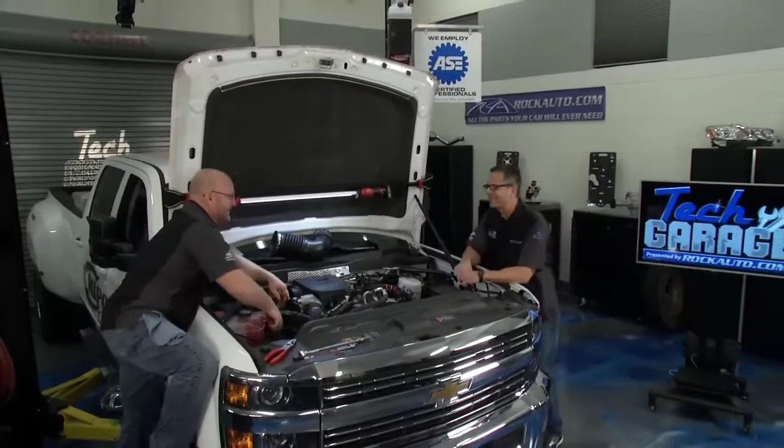Well, I went down kicking and screaming this season. First it was the hybrid, and now a 6.6-liter turbo diesel. Key word is diesel. Brian, I love the rumble, I love the torque, I love the power, I love the truck. I hate the diesel fuel.

Well, you know, there's a lot to love about a diesel, and some of it is that maintenance has just got to get done. It's not necessarily pretty and all that glamorous.

This appears to be one of those projects, but you said you had some rough starting symptoms and you heard some air sucking. So we're starting with the water fuel separator here. Talk about that a little bit.

Exactly what's going on. Well, you know, this is a work truck, of course. You go out in the morning, it doesn't want to start, sometimes hugely extended starts. I come out, I pump, pump, pump, it's ready to go. Next day, pump, pump, pump, it's ready to go. Well, I'm tired of getting out and doing that or going over meeting the guys to do it. So common problem with these Duramax is definitely that water separator sucking air.

You know, we got a couple options with Rock Auto as far as replacing the whole thing or just the seals. We'll rebuild this one, we'll put a new one on. We'll make a decision once you get it off. But you go ahead and get it off. I got a demo to set up and we'll show actually how it works.

Awesome. These things have a huge job. It literally separates the water from the fuel. Pretty cool how it does that. John's going to show you. But for us, instead of just rebuilding it from the top, we're going to replace the whole unit. There's enough miles on this truck to do that.

Routine maintenance, you'll see. You want to drain that petcock at the bottom on a regular basis and keep the water out of that system. Bad things happen in that combustion process, in the compression of all of it when you've got water in the system.

So there's two bolts back here that hold the bracket that hold it on. I've got them loose. That allowed me to have a little bit of flexibility to get the fuel lines removed. I got one to go here, and it's a little bit of an arm wrestling match down in here, but we'll get it while John tells you how this whole system really works.

Now, gasoline versus diesel, what's that all about? Well, let's take a look at a gasoline system and our own diesel system, and you can see the difference in why we actually are replacing our pump. If you look right here on this first graphic, you can see port fuel injection or direct injection. They're both gasoline, whether we're coming up here in the intake manifold down or we're going directly into the cylinder. That could be a gasoline direct injected engine.

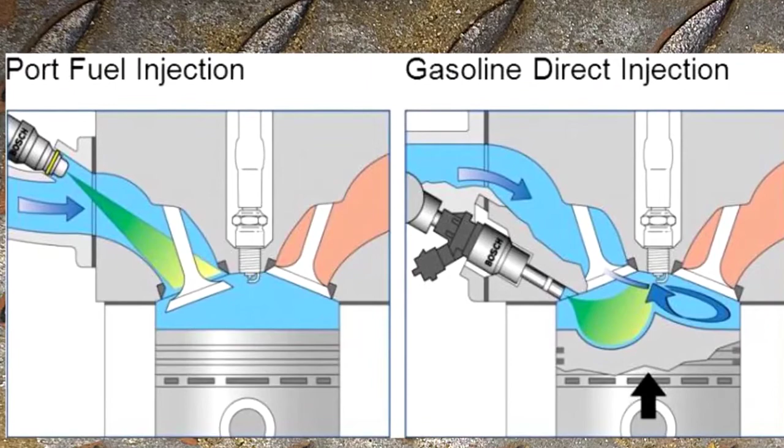Now, diesel's been doing it in the cylinders for years. Over here on the other graphic, this is actually diesel injection. So we're coming up to a high pressure pump. The high pressure pump's then coming into a little pre-chamber here. We're going into the cylinder. We're using a glow plug instead of a spark plug. Bam, explosion, we're pushing the piston down.

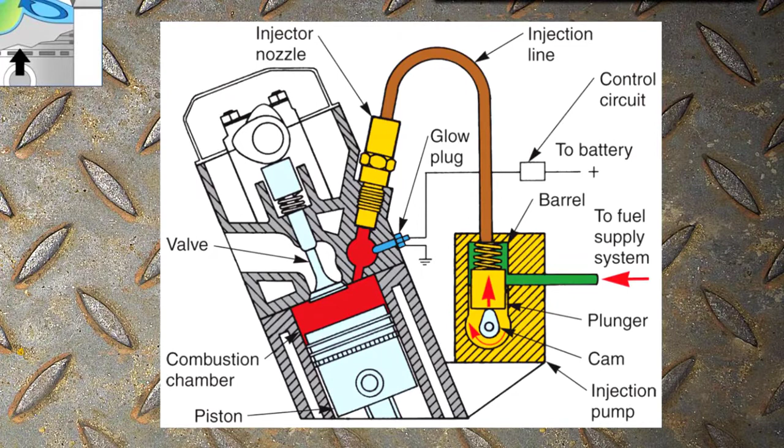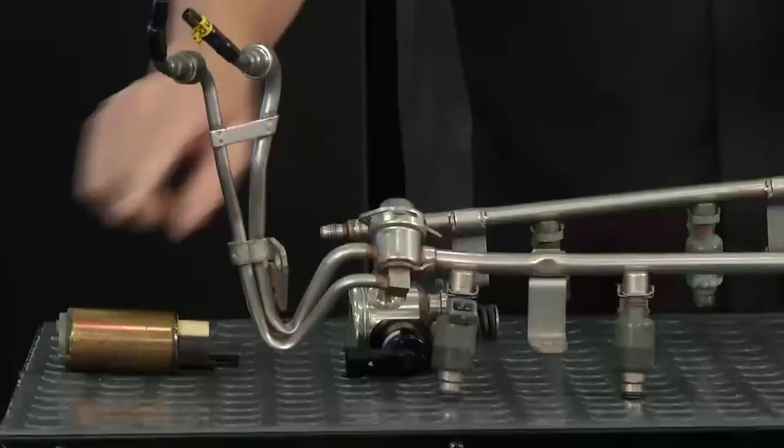Now, let's look at the two systems, the gasoline versus the actual diesel system. Now, my gasoline, everybody's familiar with, and you can look at it right here on the table. So we're starting right here with the pump. Now, the pump's down in the tank. Now, that's hugely different than our diesel, and this is why we're having a problem. Down in the tank, we're actually pushing the fuel, and when we push the fuel, it goes up through the rail and returns back to the tank on the other side.

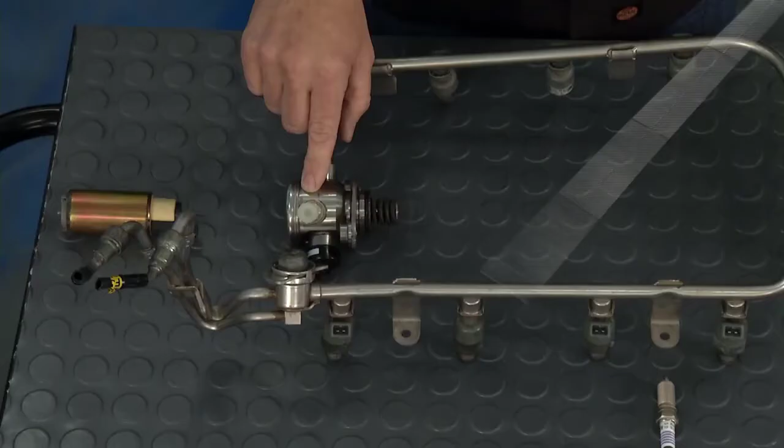Now, if it's direct injection, we're going to have a little pump up by the engine that's actually going to raise the pressure up, but we still have that pump in the tank to get the fuel to that point. Our spark plug right here ignites, bam, it's a controlled burn, cylinder goes down, everything's great. Now there's our fuel graphic right here. You can see it's located in the tank. If you pull up the regular car system, it's in the tank, pushing around through a fuel filter, returning back to the tank. Our pump is located in the tank, pushing this way.

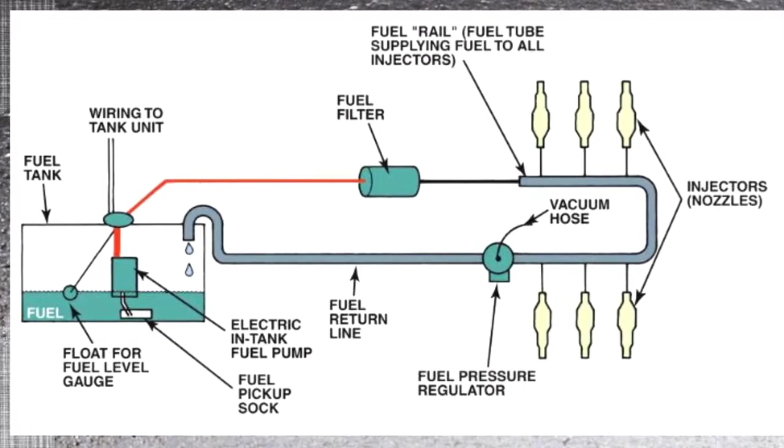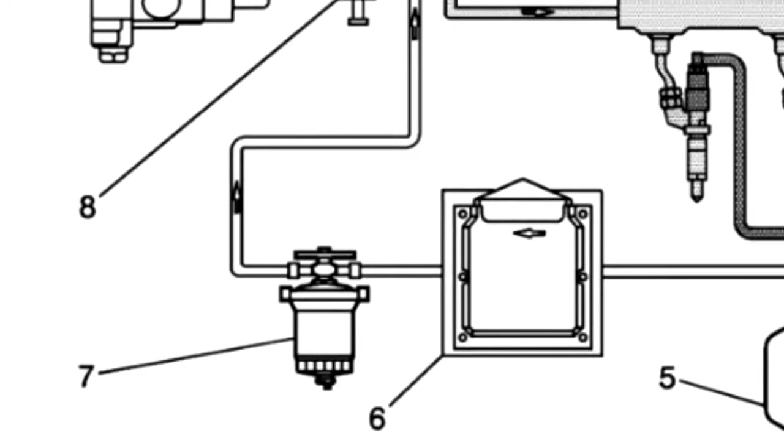Well, think about that for a minute. The fuel separator, then I come all the way up here to an injection pump. Now, my injection pump's doing two things. It's pulling right here with a suction all the way back to the tank, which could be 6 miles down the road. These are ginormous trucks.

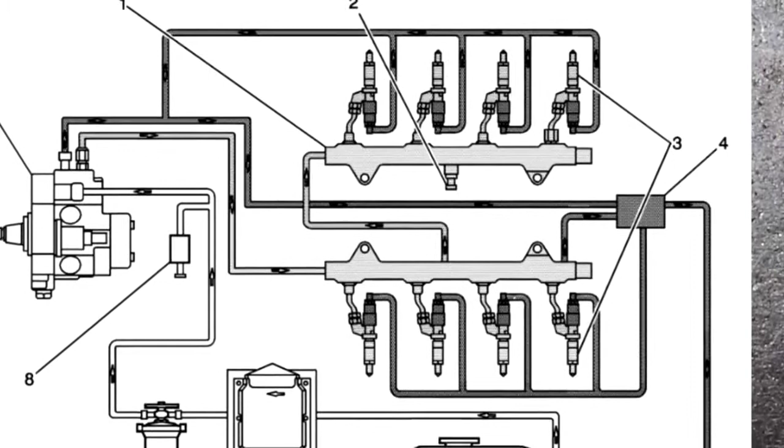And then what I'm doing is I'm taking the low pressure, changing it up to high pressure, coming up through the injector rails, mind you, 29,000 PSI we can get it injected into the cylinders. Bam, you get your explosion. We use the pump for the timing.

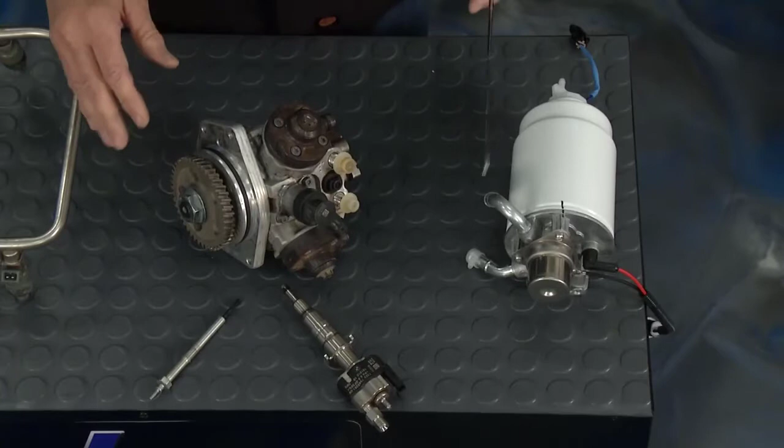Different system. Now look at it right here on the table. This is actually off our 6.6 diesel right here, and you can see what's going on. So remember, my diesel pump's all the way up here on the engine. Back located in the tank is nothing. We don't have a lift pump. So we're taking the fuel on one side of the diesel pump right here. We're actually sucking the fuel from the tank, and we have to pull it up, all right?

Now before that, right here is our fuel separator. So anytime I introduce air into the system, this guy here is going to start losing its prime, and I got a pump on the top. Boom, boom, boom, the air separator, pump, pump, pump to get it to this point.

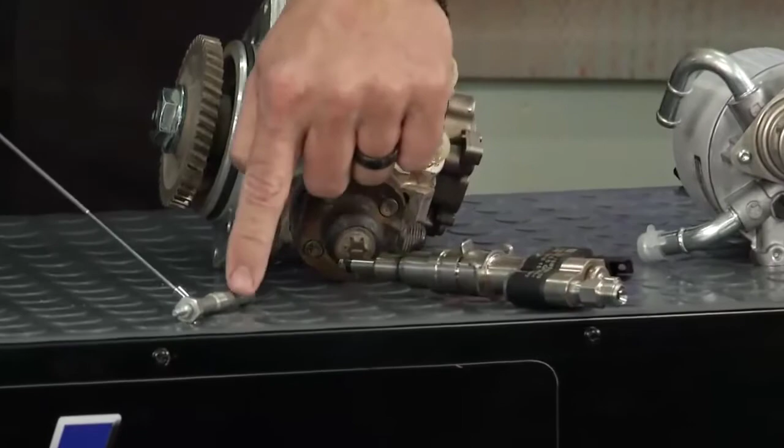Then what we do, we inject it right here. It's driven here, 2 pistons. We bring that up to 29,000 PSI. We go through this injector right here. Glow plug, boom, spontaneous combustion, bam, it blows up, you get that cool diesel rumble.

Well, that's how the system works, but Brian's got to get the filter out of there. I hope he's working hard.

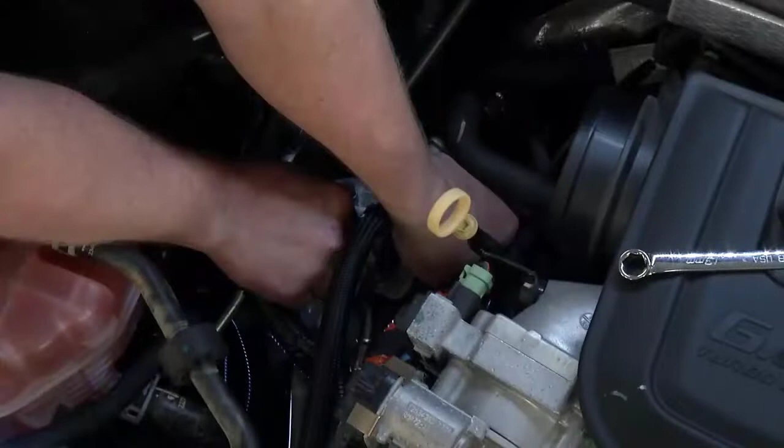Okay, last mounting bolt is out up on the top of this bracket. That means the whole assembly is ready to slip down out. Let me get this bolt out.

Now, you probably saw we have a drain pan underneath. Sure enough, when I disconnected that second fuel line, we got a little bit of drippage. You want to catch that, take care of it.

All right, the whole thing is detached, and there's a wiring harness, a pressure sensor down at the bottom. I'm going to make sure you get that undone, protect it well. Let me get this guy down out of here for you.

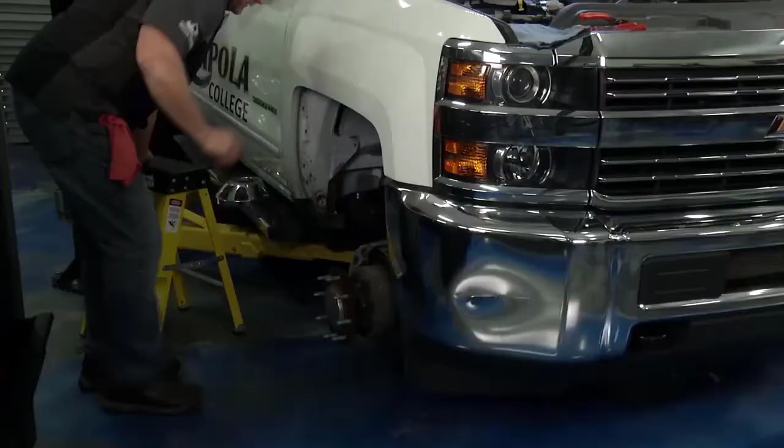Here's the harness, one click, and here is the assembly. Let me bring it up here so you can see how it all works. All right, there's the whole fuel water separator.

This is the hand prime pump. Lots of times this is what John heard sucking air. This is what we're ultimately going to rebuild, or actually in this case replace.

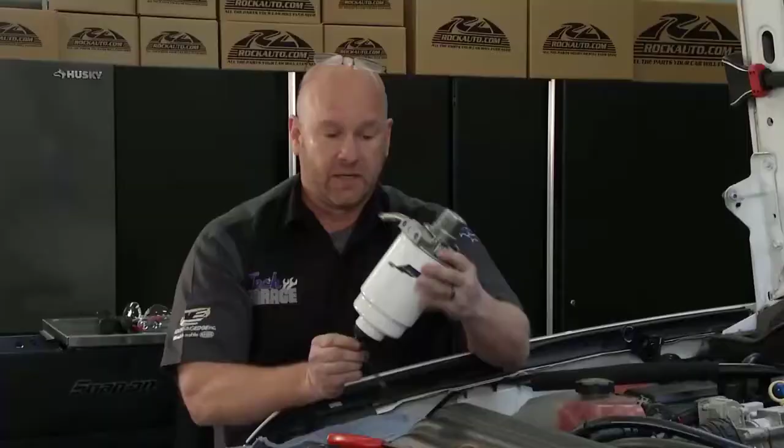This is the petcock. Routine maintenance on a diesel, you got to drain the water out of here. Water is bad in that combustion chamber, and that whole process, you're going to lose power, it's going to idle rough, lots of bad symptoms.

So we're ready to go, get the new one in. I got to get this over to John, and we got to see what's really going on inside here before we replace it with the new.

There you go. I'll tell you what, I put this mounting bolt back in, got it in the vise so I could secure it. Used a strap wrench, and I broke this guy loose. There you go. So we're loose. Tighten it up for a second.

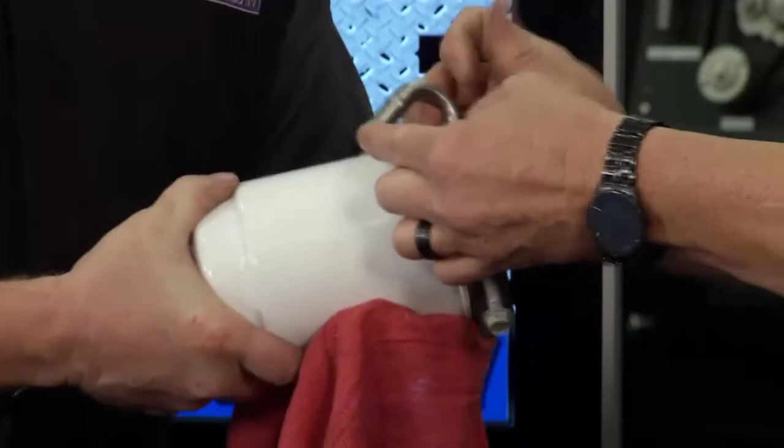Check this out. Here's our primer, so I'm priming it. I get some, sometimes I don't. Oh, look, made a little fuel, cool. So it'll work intermittently. That's probably where we're sucking the air for sure.

The difference is if I take this one here and I pump it up, hear that? That's what we need right there. Exactly. All cool, right, there's your rebuild. I'm going to get this guy reinstalled.

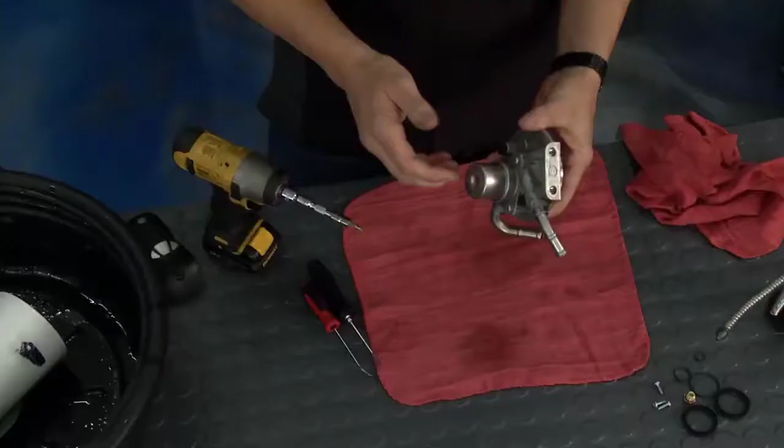Well, you know, Rock Auto's awesome because we have the whole kit right there he's going to reinstall, or for a few bucks, you can just go ahead and rebuild this. It's not too bad. Now, I got a little T20 Torx.

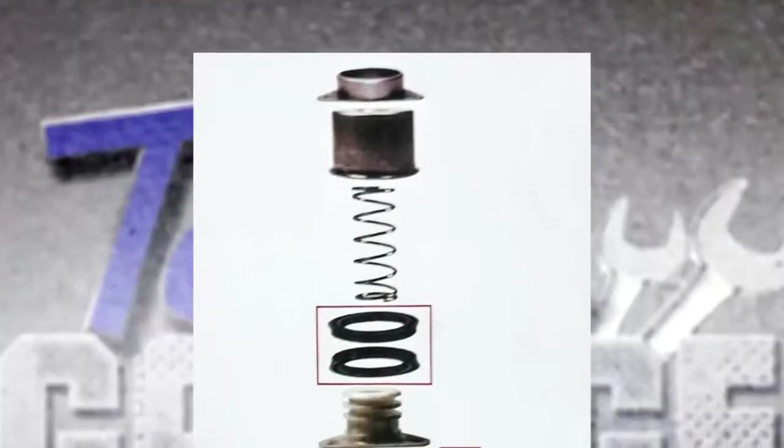You can take it apart. I'm just going to blow it apart real quick with our little ratchet here so you can see what's going on. But before we do that, I'm going to switch over here, and you can see there's actually instructions that come in the kit, which is super nice, super easy to do.

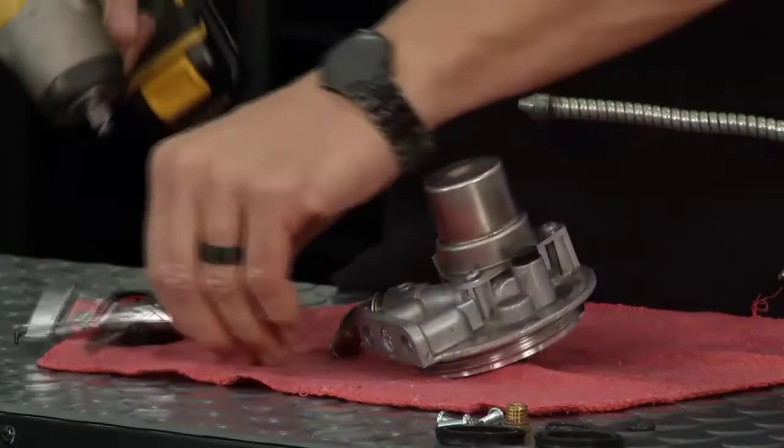There it is, all lined up. There's the O-rings, and we're off and running. So there's a couple T20 Torx on the top here. I'm going to pull these out.

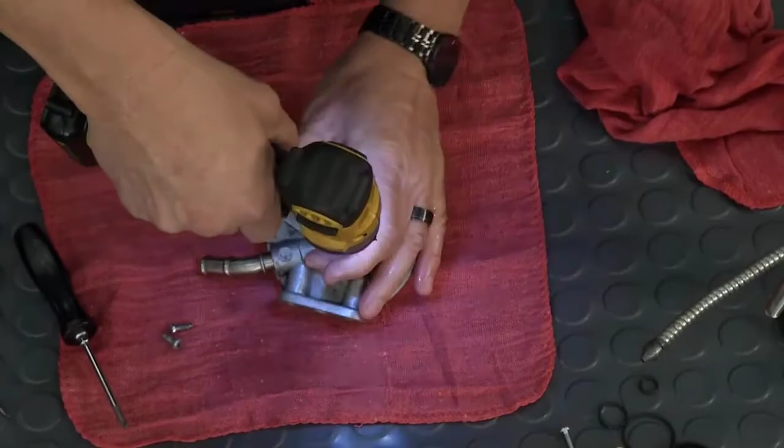And then when I pull those out, you'll see exactly what's going on with our truck is that the seals inside of here are bleeding by. There it goes. Now hold on to it because there's a little spring pressure I'm going to show you. Right here is the spring.

Take the spring out. There's the little pump and the seals inside of there that actually does it. Here's the spring located right here. So I'm going to remove the spring.

And then you got these two seals right here. Now these are the seals and these rebuild seals. This is important because you got lip seals and you want the cup facing up and the bottom one facing down because that's what's creating that prime. That's what's going on to get that suction in there.

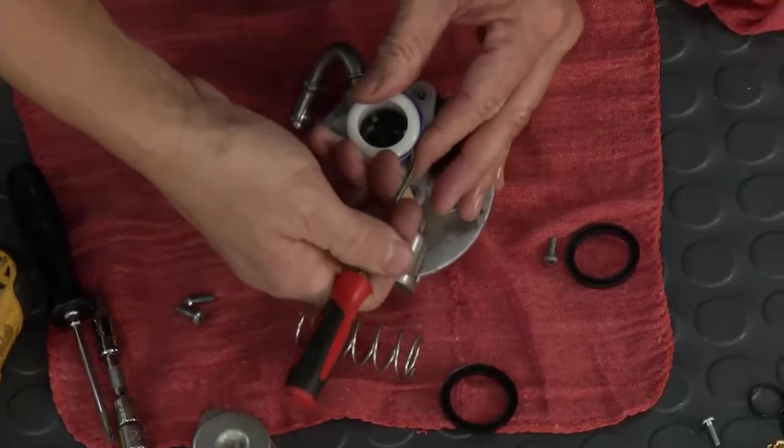So what I'm going to do is I'm going to pop these off and just go in here with a little pick and get underneath there if you can. Just be gentle. This is a plastic apparatus all right here in suction, so I can pull these off. Once I get these off, I can go around and work them up gently. I don't want to scratch or gall the surface here we're working on. So I'll pull that one off, and then we'll go down and we'll get the second one off down here.

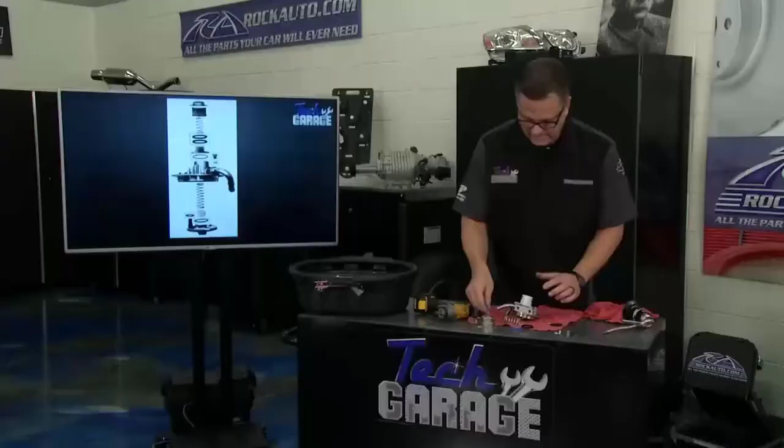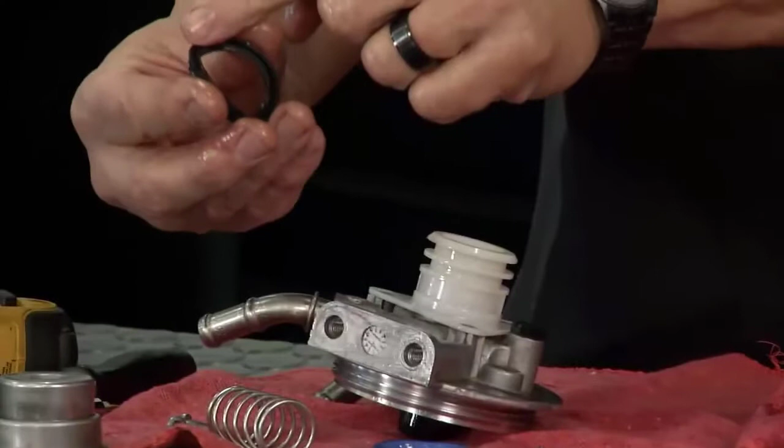Okay, now the lip seal is located right here. You want the lip seal down on the bottom one. So I'll work that one on, going down on the bottom one. We'll go all the way down to the second one down there. Walk it down, just be gentle.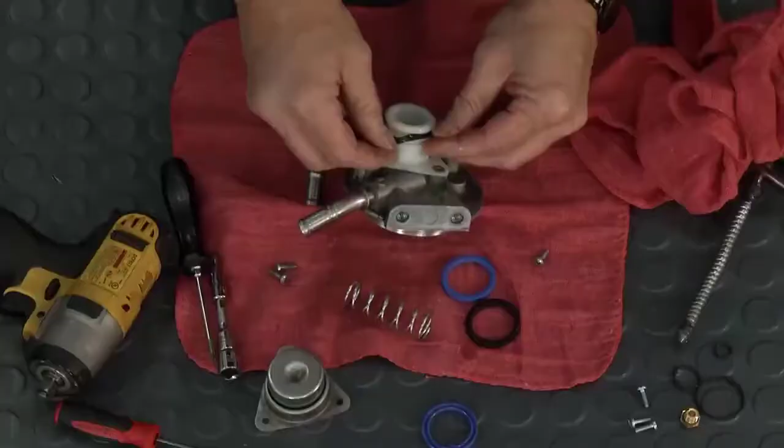Get the seal in the facing down position all the way around. Once you get it down there and in the groove, you want to come back and just make sure all the lip seals are open on the bottom portion. Be careful, don't rip it. Pick it through there. All right, and then we can do the same thing.

Now this lip seal here is going to be on the top portion. When that's on the top portion, it's actually going to come through here, and that's going to create the vacuum for the pumping to get our fuel on there.

All right, now we can just put this back and torque it to specification, but there's a couple seals I want to show you on the bottom. So if I go to the bottom here and I pull off the other portion down here, two Torxes down here, 20 Torxes once again, and then be careful here as well.

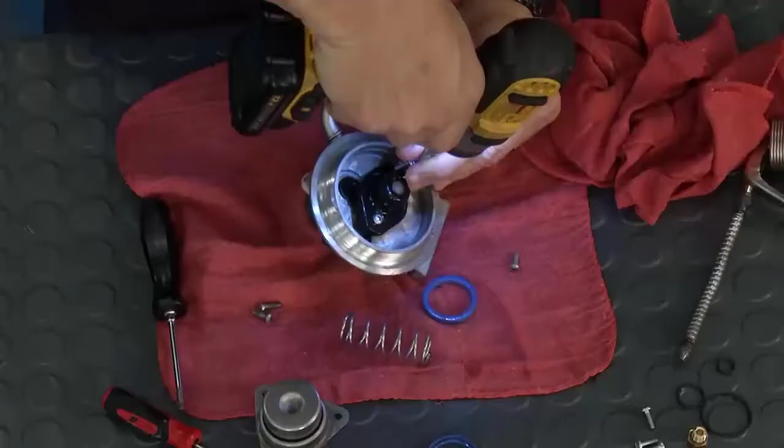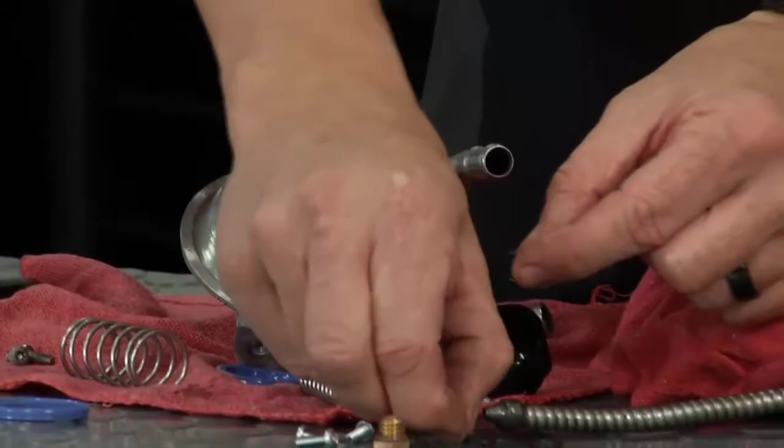All right, a little bit of spring pressure right here and a check ball. You can see it right here, the little check ball, be careful, take care of that. And located right here is another little O-ring. So this O-ring here, they all come in the kit. You can put that on there like that.

And then what you want to do, once again, just lube everything up. Pretty simple process, and like I said, just follow the instructions. I mean, they're all right there. It goes just like that.

Also on the top right here, you actually have a valve right here. Rock Auto in the kit gives you a nice brass one that's not going to ream off. Take that out, replace that.

On the bottom here, I'm going to fix these seals, they're a little contorted, I'll get them right. But you can pull this bottom piece off as well. There may be an O-ring under there, but you don't want to mess with this, that's a non-serviceable device. So what we do is we'll get this all tightened back up. We'll have a spare, it's pretty cool. Or you can put it back on your truck and you'll be in good shape. You won't have a hard starting problem.

Let's check in with Brian, he's moving along pretty good.

Well, it's good to see that the rebuild process isn't all that bad, but I'm happy we're putting a whole new system in here. This truck was a prime candidate for it. It's a work truck, high miles.

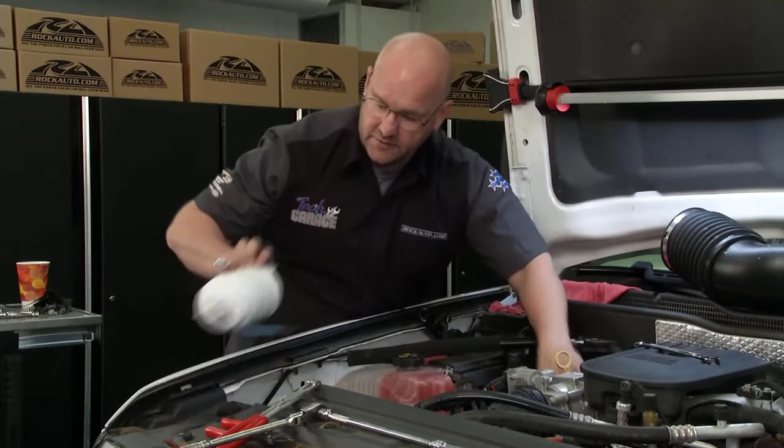So what I've done here is I've got all these cooling lines, everything loosened up, clamps loosened, to give me every opportunity to not damage any of the connectors of the petcock valve as we go down in. So I'm going to hang the new assembly filter separator right here. I'm just going to take one bolt and go finger tight to kind of hang it in space there, so that I can reconnect those fuel lines.

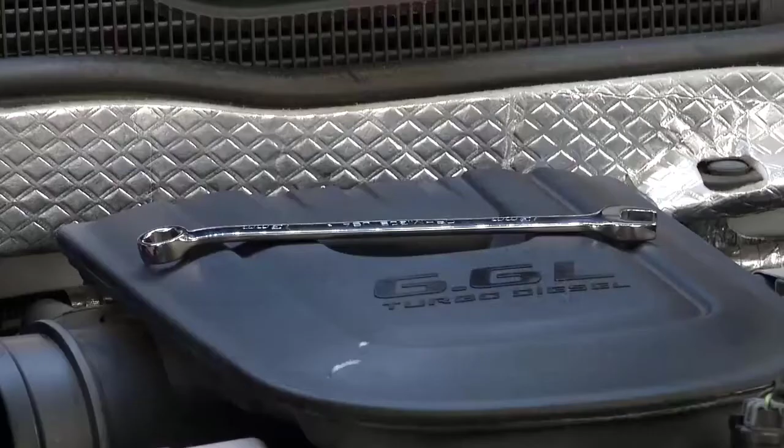The fuel lines, you don't want any leaks. You got to get those clamps seated right. And again, access is the biggest challenge. Not all that complex. And of course, you see that open end wrench laying there? That's the only thing that works in this tight space, one flat at a time. So take your time, get it right, and then I'm going to begin reconnecting the fuel lines.

Now I cheated, I put a little bit of silicone lubricant there so they'd slide up on you. Want to cross that shoulder, you got to get the clamps right. Last thing you want is any kind of a leak.

Let me work with one here, get it started up over, and then I'm going to have to use fancy pliers to get it on. I'll get this on, I'll get the whole assembly remounted. Down at the bottom, we'll reconnect the connector.

I'm going to use a little dielectric gel there because it's down in the moisture behind the suspension. Make sure that's all good. Hey guys, you got to keep water out of the fuel system. Otherwise, you introduce hydrolysis, oxidation, microbes start to grow, bad things start to happen. So this is key to the whole heart and lung system of this truck.

So not hard to do. I'm going to get it buttoned up and get this thing back on the road and ready for work.